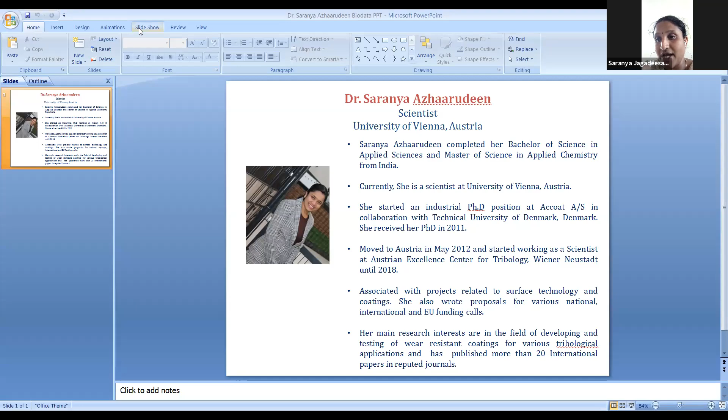Dear participants, it gives me immense pleasure to introduce today's speaker, Dr. Saranya Azhaarudeen, who would enlighten us on the topic Coatings Tribology for Protective Applications. She completed her Bachelor of Science in Applied Sciences and Master of Science in Applied Chemistry from India. Currently, she is a scientist at University of Vienna, Austria.

She started an industrial PhD position at Accoat A/S in collaboration with Technical University of Denmark, and received her PhD in 2011. She moved to Austria in May 2012 and started working as a scientist at the Austrian Excellence Center for Tribology, Wiener Neustadt, until 2018, associated with projects related to surface technology and coatings. She also wrote proposals for various national, international, and EU funding calls. Her main research interests are in developing and testing wear-resistant coatings for various tribological applications. She has published more than 20 international papers in reputed journals.

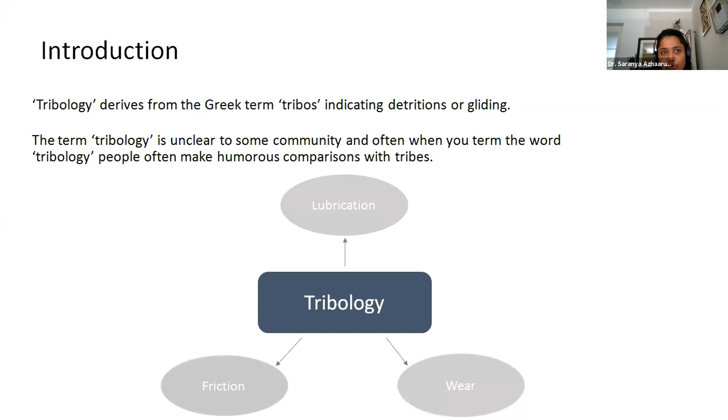So whenever I talk to my friends about tribology, people always ask, what is tribology, is it something to do with biology or with tribes? Because the term sounds very much related to tribes, but it has nothing to do with either, though it may be application oriented in biology. Tribology means friction, wear, and lubrication - any science dealing with these topics falls under tribology. There are many branches within friction, wear, and lubrication. Lubrication can involve chemistry, chemical engineering, mechanical engineering. Wear involves mechanical engineering, material science, surface coatings, chemistry, physics, and many more fields. Friction also has many comparisons we can draw from daily life. What is friction and what is wear? Next slide please.

So what is tribology? Why is it so multidisciplinary? It is a very interdisciplinary field, because if you start with the term tribology, there are so many fields involved. It starts with material science, because material science is a very basic thing for tribology to learn the basics.

In material science, corrosion prevention is one such topic, coating technology, tribochemistry, environmental technology, and recycling. These are the terms that count to material science when it comes to tribology.

When it comes to mechanical engineering, there are so many investigations possible, like damage investigations and testing of lubricants, testing of surfaces, and so many calculations involved in mechanical engineering when it comes to tribology. That is contact mechanics, and also tribometry, a field of mechanical engineering contributed only to tribology.

When it comes to technology, there are so many involved, like surface technology, construction technology, and knowledge management in tribology. And there are so many application-oriented technologies based on chemistry, like lubricant chemistry, lubricant technology, tribochemistry, tribo-layer formation, etc.

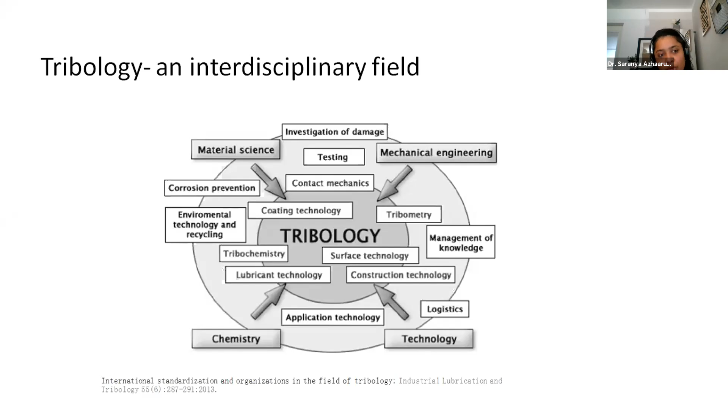So, tribology is really an everyday phenomenon. When you walk, you need good friction to have balance. When you don't have friction, you will fall. This is very clear.

Friction is everywhere, whether when you walk or, for example, in eye lenses. When you apply eye lenses, very good lubrication is very important, and this is also a part of tribology.

Many researchers are working on biotribology, focusing on improving the comfort of lenses, because I saw many people who use lenses having problems with lubrication, like burning sensation in the eyes, and they are not very comfortable. So a lot of research in the world is going on in biotribology, focusing on these lenses to increase lubrication and comfort for people who use them.

When it comes to sports, for example cycling, it's very important to have a very good grip between the tires and the road. This is basically friction. When you don't have good friction, you will really fall. So this is very important for safety measures, not only in cycling but in many other fields.

Like in aerospace industry and automobile industry, it's very clear they need very good friction in many fields, like trains and tracks. The friction between the wheels of the train and the tracks is very important, and they need to have very good friction to maintain good balance.

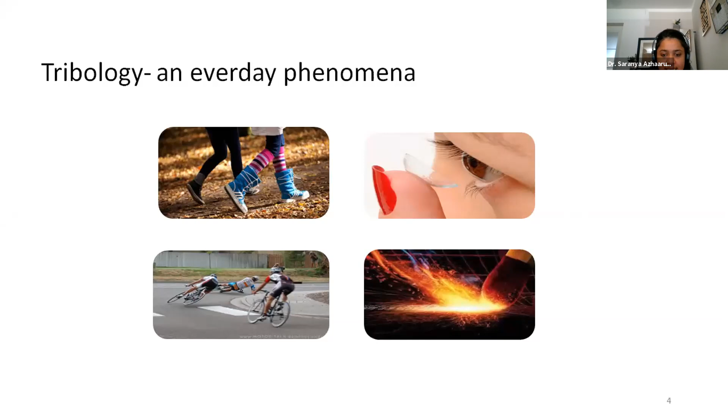So, friction - what is friction? Friction is resistance to motion between two bodies in contact. Whenever there are two bodies in contact, there will be a frictional force that we don't see, that you don't feel sometimes. It depends on how the surface is and how the other body is.

For example, in this picture, you can see a man trying to push furniture, and there is a motion involved in pushing. There is a force from the man and a motion happening, and there is a force of friction which always acts in the opposite direction of the pushing force. So whenever there is a two-body interaction involving sliding, there is always a frictional force involved.

For example, on a smooth surface you need a very small push because there is very low friction. Whenever there is high friction because of a rough surface, you need a big push and too much force is involved. These are very basic examples you encounter in daily life at home.

Friction always works in the direction opposite to the direction in which the object is moving. For example, when you try to push a book along the floor, friction makes this quite difficult, but when there is low friction, you can move the book really easily.

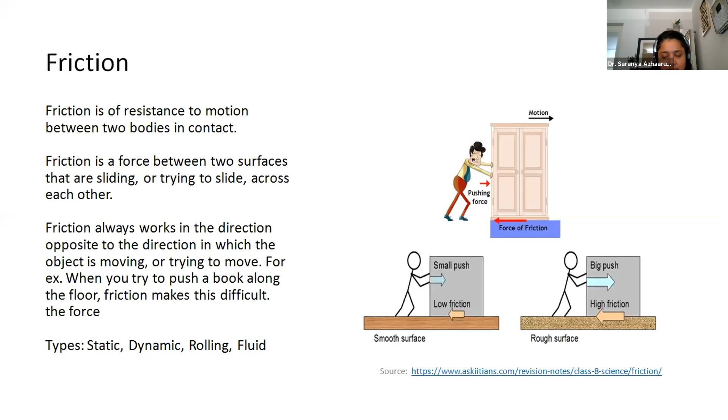Now, what is wear? Wear and friction are all interrelated phenomena. Wear is defined as the irreversible material loss of interacting surfaces.

Whenever there are two materials involved and sliding happens, there is wear - a problem of material loss due to friction or due to other conditions, like low lubrication or corrosion. Any wear can happen, and when wear is happening, there is a material loss.

There are so many wear mechanisms involved - physical and chemical processes within these sliding pairs which lead to changes in material, shape, or chemistry. This all comes under wear mechanisms. For example, if you see this picture, there are two bodies in contact, and there are some asperities - the form of the surface. There are so many possibilities of wear mechanisms that can happen.

Surface fatigue is one kind of wear mechanism where there is a fracture happening and material can be removed. Abrasion is a very common phenomenon - there is wear happening, and whenever there is material removal, scientists normally give importance to whether it happened because of abrasion.

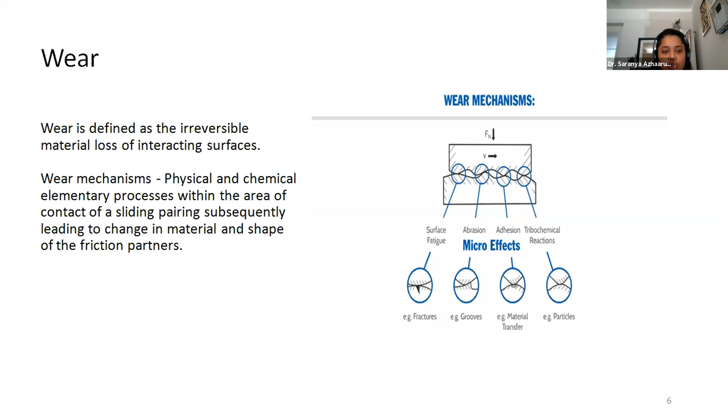Tribochemical reactions - there are so many forms of tribochemical reactions possible. Particles involved in the reaction can bring about tribochemical reactions, and lubricants used in such abrasion can also create some tribochemical reactions. So these are the four different types of wear that normally occur in any kind of sliding between two surfaces.

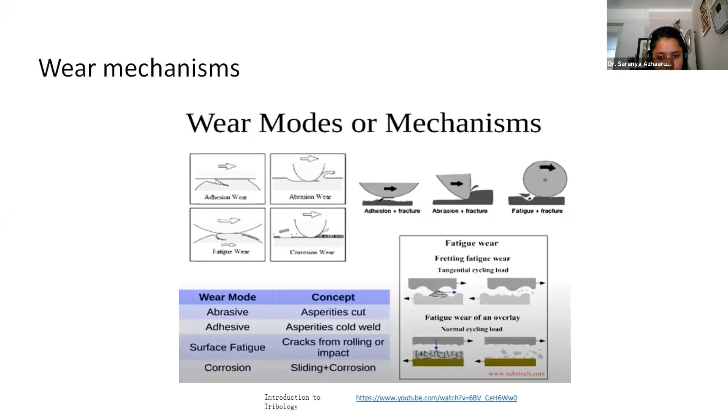So what is the interrelation between friction, wear, and lubrication? This is clear - whenever there are two surfaces, there can be increased friction between them that can cause wear, or there can be excessive heat formation. So these are the two possibilities whenever there is an increase in friction.

So what are the forms of wear? We have already seen adhesive, abrasive, fatigue, or corrosive wear. And what will happen when there is increased friction? That can cause a lot of problems, like loss of viscosity in the lubrication.

So you need to use more lubrication to achieve the same performance, to decrease the friction and decrease the wear. Or there is an increase in additive depletion, an increase in oil oxidation, or an increase in varnish potential. These are the problems that can happen when there is excessive heat formation because of the lubrication used.

These are the interrelations - whenever there is increased friction, there can be increased wear, and it can also form excessive heat. So the interrelation between friction, wear, and lubrication is very important to know what is happening on the surface and what has to be improved to improve the lifetime of the surface.

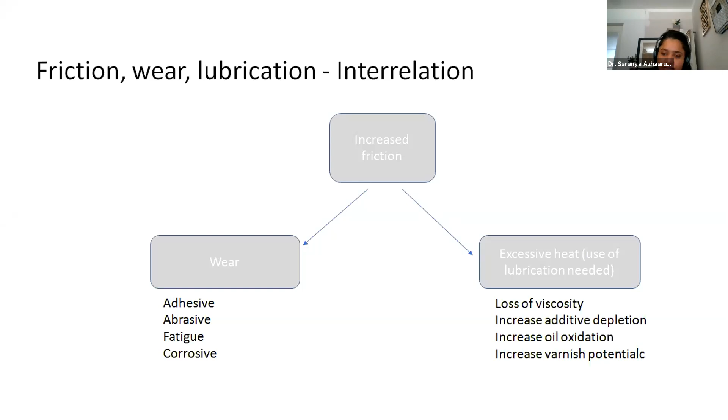So what are lubricants? Generally we are using lubricants in many applications in daily life - like even in cooking we use oil. This is to reduce friction and improve properties between the food and the surface. Same way, we use lubricants to reduce friction and wear between two surfaces. When it comes to automobile applications, we are well known that we use a lot of lubricants.

What does a lubricant do in an automobile or elsewhere? A lubricant's main function is to control friction, generally to reduce heat generation and energy consumption. It also controls wear - as I said in the last slide, it reduces mechanical and corrosive wear. It also controls corrosion, protecting surfaces from corrosive substances. And it controls temperature - whenever there is a rise in temperature because of friction or wear problems, it absorbs and transfers the heat, which is a very good property of a lubricant.

And what does it do with contaminants? Normally it controls the contaminant level in automobile usage or any surface that you use, and it tries to transport particles and other contaminants to the filter so that it reduces the contaminant level in the lubrication.

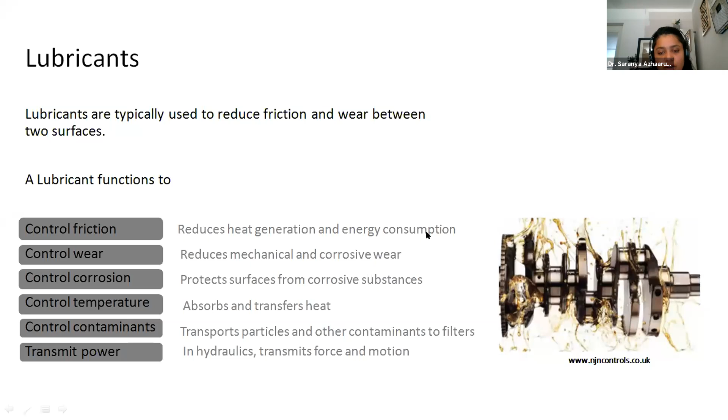And as I said, it transports particles and also transmits power - like in hydraulics, it transmits the force and the motion. So when you see a picture of an automobile part filled with lubrication, an oil lubrication... Can you change the next slide, please?

So, I don't know if you have heard of the Stribeck curve. The Stribeck curve is basic for any tribologist to work on any problem. It's named after Richard Stribeck, a well-known German mechanical engineer, who first described the concept in 1902.

This graph showcases how the generation of lubricant films is critical in reducing friction and wear of machine parts. There are three types of friction generally: boundary lubrication, mixed film lubrication, and hydrodynamic lubrication.

In boundary lubrication, when two surfaces come together, there is good contact between them. Lubrication happens at the boundary level, and sometimes in this case the wear is too much, so they control the wear using additives to reduce it.

In mixed film lubrication, some parts are touching and some parts are separated by the lubrication - that's called mixed film lubrication. Normally in such cases, wear is controlled by viscosity and the boundary lubrication film, and that's how it controls friction and wear.

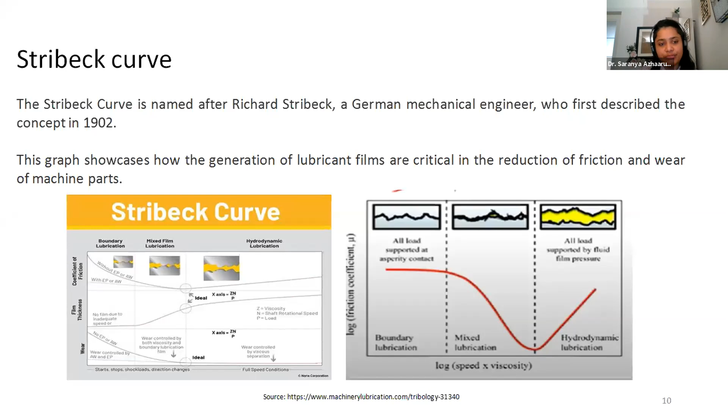So can you please change to the next slide? These are the common test rigs, test apparatus, that we use in our field of tribology.

To start with, I'll show the last machine, called pin on disc. In any tribology lab, you'll find a pin on disc machine. It's a very basic machine to study any kind of tribological behavior. The pin is holding on the disc, the disc is rotating, and the pin is in touch with the disc.

The pin can be steel material or a different material, and the disc can be coated, or the pin can be coated. In a third case, both materials can be coated and tested. This is a very basic test whenever there's this kind of tribology test.

The first picture is called the FZG test rig. In this test rig, you can see there are two types of gears tested. Normally here you always test two gears. This is a normal test used in the automobile industry to test the failure of gears and the lifetime of gears.

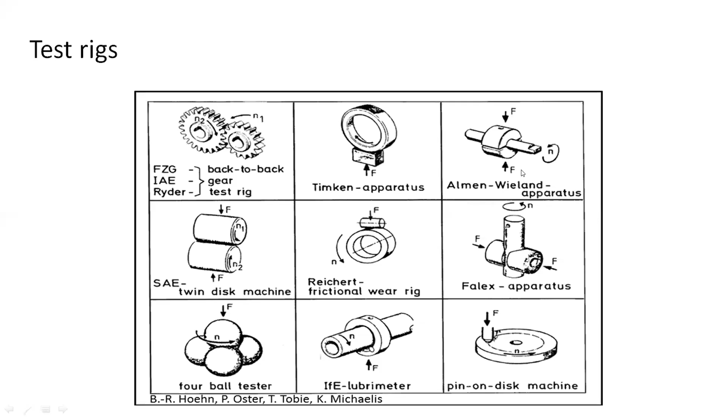There is also the Almen-Wieland apparatus, which is rarely used to test some specimens for frictional properties. The twin disc machine is also quite common, with two cylinders rolling to see how rolling friction happens between two surfaces. The frictional wear test rig is like a cylinder on a ring, where the ring rotates and the cylinder moves on it. You can coat the ring or coat the cylinder, or keep one as a steel specimen, to see how the coating and steel react on such surfaces.

Mostly, the Falex apparatus is also used in some typical mechanical labs. The four-ball tester is a very famous testing apparatus, with four balls to see how rolling friction, fatigue possibilities, abrasive wear, or adhesive wear happen. This is a very good form of testing all these possibilities in one test. There is also something called the lubrimeter, which is not really used much. In all these pictures, you can see pin-on-disc is the main apparatus used in almost every tribological lab.

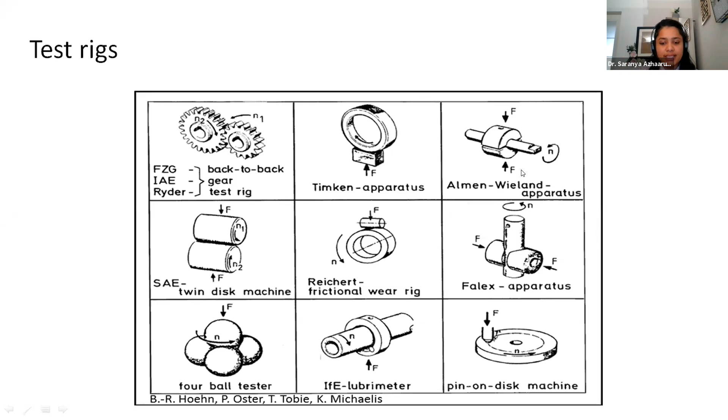So what are the lubricant types? You can categorize lubricants in different ways based on their form. Liquid lubricants, as the name says, can be a mineral oil, a natural oil, a synthetic oil, or an emulsion.

When it comes to solid lubricant, it is clear that it's a solid form of lubricant. It can be a powder, a coating on a surface, or a composite like graphite, PTFE coating, or molybdenum disulfide. I will talk more about solid lubricants at the end of the presentation.

Gaseous lubricants are in gaseous form. Semi-solid lubricants, generally greases, are called semi-solid because they're not liquid and not solid. Also, soap emulsified with mineral or vegetable oil is called a semi-solid lubricant. All these lubricants are chosen based on the application, like what you want to use and where, so depending on the application you choose which form of lubricant to use.

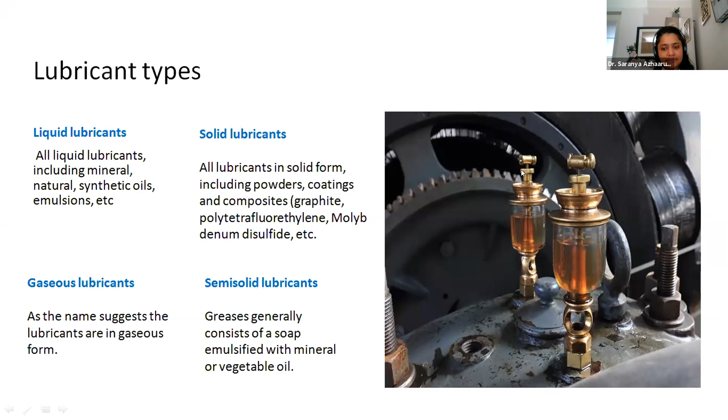So, additives. What does an additive normally do? As you see, we always use additives in automobiles, for bikes, cars, and everything. This is really to enhance an existing property of an already existing lubricant, or to add a new property, like to reduce wear, reduce friction, improve lubricity, decrease viscosity, or to suppress any undesirable property.

Undesirable means wear and friction, in automobile applications normally. The main types of additives we use are called anti-wear additives. Anti-wear additives are mainly used to reduce wear through the growth of a protective layer on the surfaces. For example, zinc dialkyl dithiophosphate, simply called ZDDP, is a very good example, very well studied in the field of tribology and lubrication. ZDDP is used in almost most studies related to anti-wear additives.

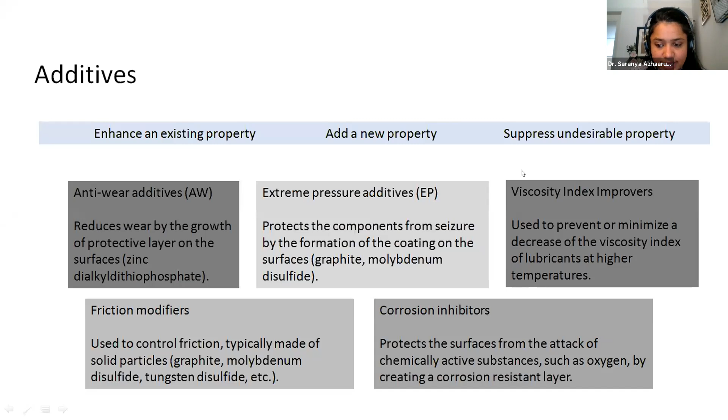What kind of additives are normally used when it comes to engine oils, ATF (auto transmission fluids), general oils, hydraulic oils, industrial gear oils, automotive gear oils, or greases? What kind of additives are normally used in these kinds of oils?

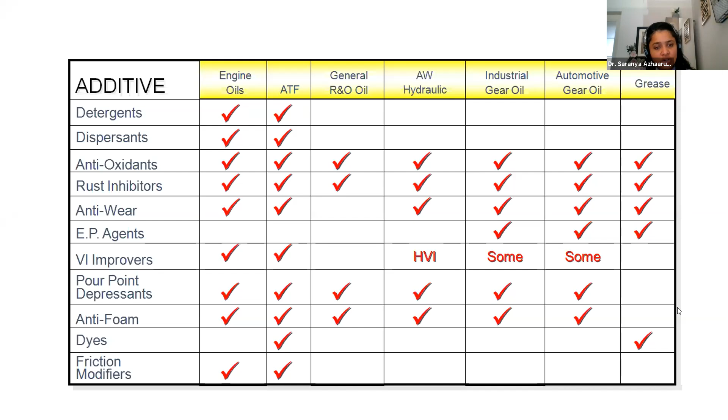Detergents are normally used in engine oils or ATFs. Dispersants are normally used in engine oils and ATFs. Antioxidants are used in all types of oils, and rust inhibitors are also used in all types of oils. Antiwear additives are used in engine oils, ATFs, hydraulic oils, automotive gear oils, industrial gear oils, and greases.

Extreme pressure additives are used sometimes in industrial gear oils, automotive gear oils, and greases whenever there is extreme pressure happening. Viscosity improvers are normally used in engine oils and ATFs, and sometimes in industrial gear oils and automotive gear oils.

Pour point depressants are used in almost all kinds except grease. Antifoam additives, dyes, and friction modifiers are also typically used in engine oils, ATFs, and other kinds of oils. So this is a table showing what kind of additives are normally used in different kinds of oils we use in daily life, in automotive or other applications.

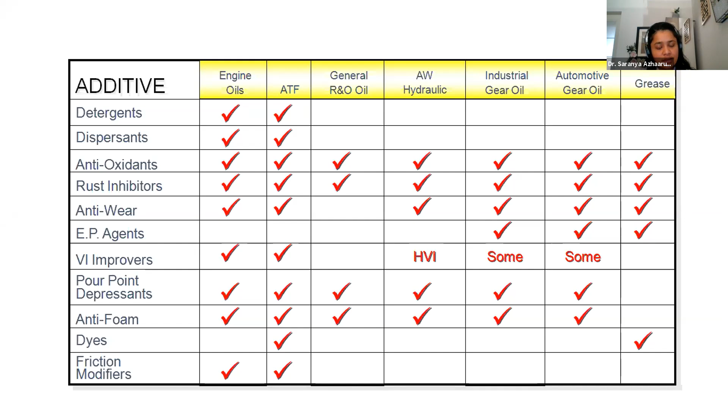I'm not a very big expert in additive chemistry, so I'm just giving an overview of what kind of examples we have in antiwear agents.

Antiwear agents are mainly used because they have a very low activation temperature - you really need only a low temperature to activate them. They can create a durable layer that shears easily under boundary lubrication conditions. That's the main usage of antiwear agents.

These kinds of layers are very important in some applications. In cases like ZDDP, they replenish these layers, which improves the lubrication for a long time. That is the main point of using antiwear agents in such applications.

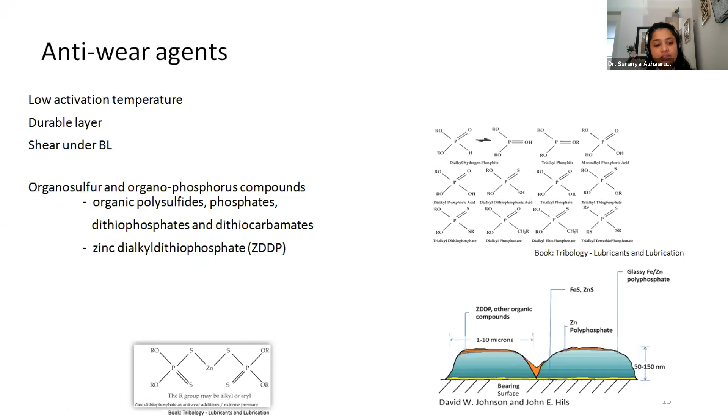Extreme pressure additives are mostly used when you need anti-seize or anti-scuffing properties. Generally, EP additives need a very high activation temperature compared to antiwear agents, and they form extremely durable protective films.

These thermochemically formed layers are extremely durable in the case of EP additives. Normal examples are iron phosphide, sulfide, sulfates, oxides, and carbides - these are the main examples used for EP additives, to avoid micro welding, scoring, or seizing of materials under extreme temperature and mechanical pressure.

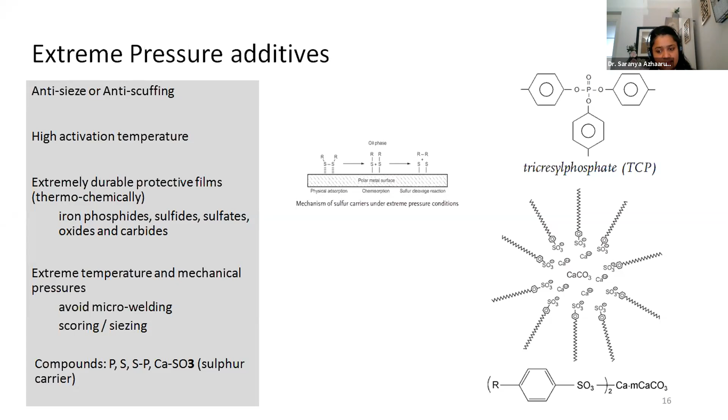Friction modifiers are really a very mild antiwear or EP additive. They are also called, in transmission fluids containing them, 'anti-squawk' additives - normally called friction modifiers.

They have durable, low-resistance films formed because of an adsorption mechanism when using friction modifiers in the oil. Mechanically working solid lubrication compounds like MoS2 and PTFE are also a form of friction modifier. Their classification is mainly based on how they form these layers - for example, adsorption layers form with long chain carboxylic acids.

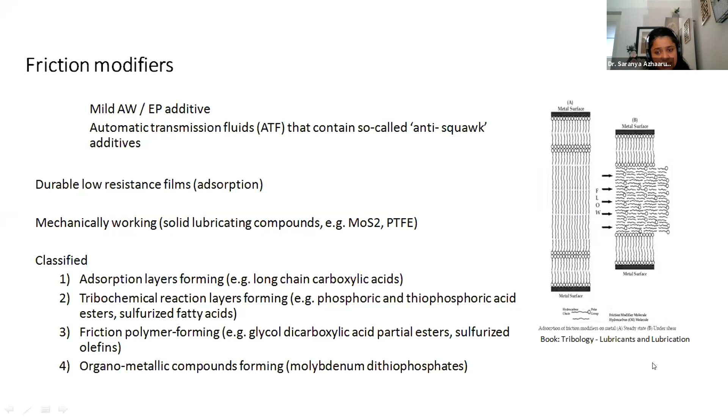They also form tribochemical reaction layers with phosphoric acid and thiophosphoric acid esters, sulfurized fatty acids, and friction polymer formation can also occur. Sulfurized olefins and glycol dicarboxylic acid partial esters are also examples, as are organic metallic compounds and molybdenum dithiophosphate. As shown in the picture, friction modifiers flow between metal surfaces to improve lubrication properties.

Foam inhibitors are also a kind of additive, normally used to enhance the oxidation and cavitation properties. Whenever there is insufficient oil transportation, these foam inhibitors are used. The mechanism is mainly to attach and separate bubbles, coalesce them into a bigger bubble, and rise to the surface, easily carried out of the lubricant due to insolubility and their strong affinity to polar metal surfaces.

The foaming tendency is influenced by many different factors, especially surface tension, which is very important for foam formation. Surface active substances like detergents, corrosion inhibitors, and other ionic compounds are very much influenced by surface activity. Surface foam and inner foam are also physically dissolved up to 9% in mineral oil. So these are the factors that normally influence foam inhibitors.

Linear and cyclic polydimethyl siloxanes are a typical form of foam inhibitor. I don't want to go into detail on this topic since it's not my expertise, so there are just some examples I wanted to give.

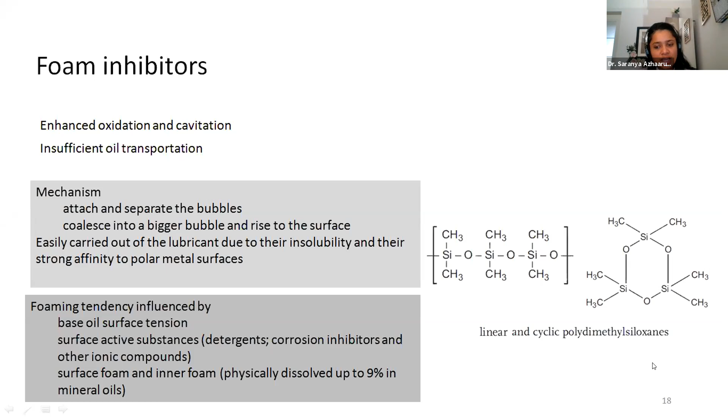Can you please change to the next slide? Yeah, so as many people know, there are many methods.

Viscosity is a very important parameter for a lubricant, and the Stabinger viscometer is one kind of viscometer that calculates viscosity. The higher the viscosity index, the better the lubricant. So whenever the lubricant performs well, they always check if the viscosity index is higher, which is better because of a minimum change in viscosity when there is a temperature rise.

ICP, inductively coupled plasma, is a very common method used for lubricant analysis, famous for analyzing the elements in additive substances, particles, and contaminants if there are any in the lubricant. FTIR is also a very famous analysis method used in almost all forms of chemistry—Fourier transformation infrared spectroscopy—which identifies lubricants and their components through qualitative and quantitative analysis of lubricant conditions.

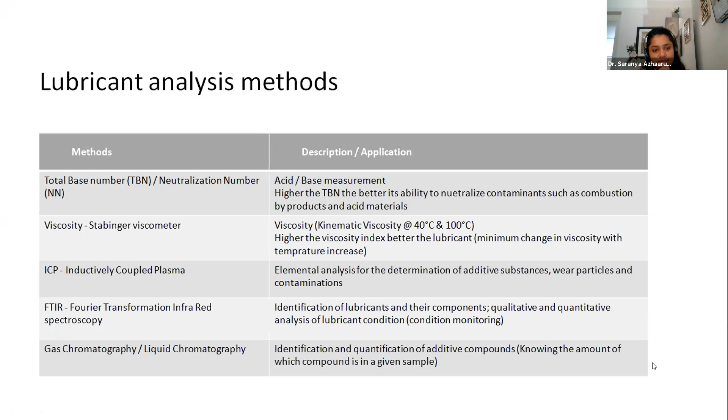Can you please change to the next slide? I'm not sure if many people have known this, but Volkswagen, a very big company in Germany, was involved in a scandal with diesel emissions. It was very big news at the time, I think in 2016 or 2017.

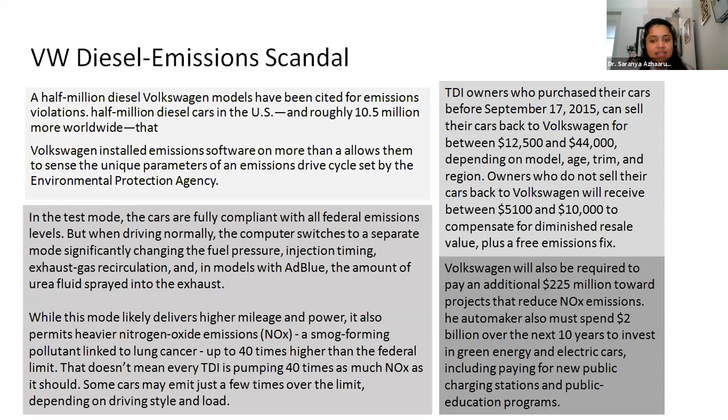So can you please change to the next slide?

It is clear that with increasing temperature, the viscosity of the oil is different, and the lubricant flow is also different. So mainly, to understand lubricant transportation on a surface, the tribological parameters have to be understood so that good lubricant transportation is formed between surfaces in automobile or other applications.

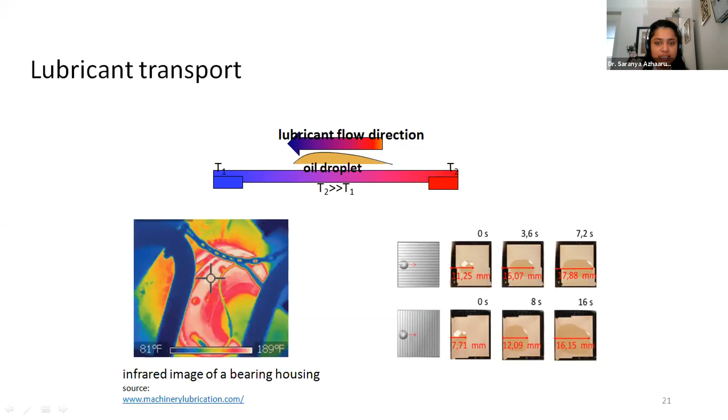So this is an example to show how lubricant studies are related to the tribology field. Can you please change to the next slide?

These are the basic things I covered, like friction, wear, the forms of wear, and lubrication. Generally, tribology can be applied in many fields, like the energy industry. For example, wind turbines need their blades to have a very good wear life, like for 50 years or so. They really have to have a very good lifetime. In that case, tribology is used in the energy industry.

There's a big Danish company called Vestas that invests billions of dollars in research related to energy tribology, to improve lubrication and wear properties of the blades, so they don't have to replace the blades once a year, because it's too expensive to change or protect these kinds of surfaces. So they're really trying to apply tribology in these kinds of industries. That's an example from the energy industry.

When it comes to the aerospace industry, there are also many forms of tribological studies happening. I work in a department dealing with aerospace industry applications, mainly studying tribology in helicopter gears. Why is it so important to study tribology in helicopter gears?

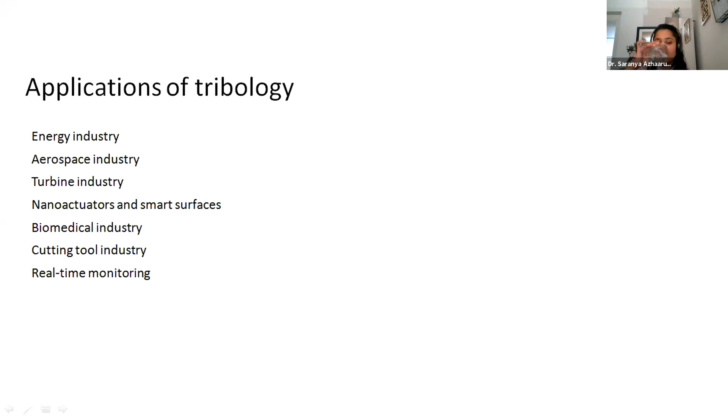So as I said, how important is tribology in machine elements? As I told you, there are many examples like in the aerospace industry and automobile industry. In machinery, for example bearing and gear drive, it's really important to understand what is happening related to tribology. In production and machining, tool industry, it's very important to see how tools are manufactured without any defects. In transportation, the friction between tire and road is very important. In medical technology, for example hip joints in biomedical industry, tribology is important to know how lubrication function between the hip joints works, and the lifetime of these joints. I will give more examples later.

Operational parameters are also very important in all these applications. So what are the main operational parameters? Whenever we start a tribological test, we have to decide what kind of load we need to apply in this kind of application, and what kind of motion we need. We are applying a load on a surface, and how much load we apply has to be determined based on the application. We also want to know what type of motion.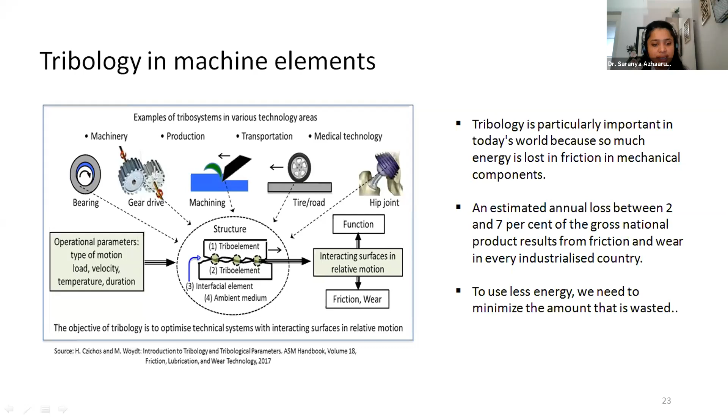The role of tribology in energy efficiency: if you look at a race car, a race bike, a roller bearing, a ball bearing, normal gears, or a tire on a road when it's raining or snowing, everything is important when it comes to tribology and energy efficiency.

By doing this, we can save a lot of money in energy efficiency, and we can also improve the environment by reducing these kinds of losses using tribology. Energy and raw material resources can be conserved for future generations, environmental damage can be avoided, and occupational safety and protection can be improved.

Many accidents are happening in the tool industry even now, which can be improved by really knowing what is happening between two surfaces - is it a frictional problem, too much heat dissipation, or really a normal tribological problem? These are the things we have to know about why tribology is important in energy efficiency.

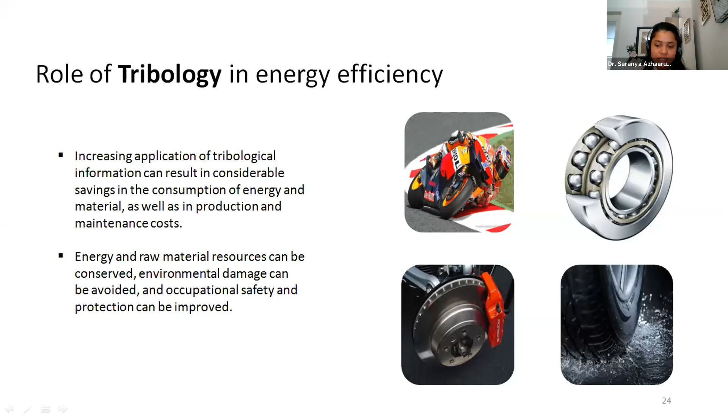This is more related to my topic, materials tribology. What kind of materials do we use every day? We use a lot of metals and alloys, ceramics, composites in the airplane industry, and lots of polymers and plastics. In countries like Europe and the USA, we use a lot of wood for construction and other purposes. Different engineering parts are subjected to tribological loading at different loads, speeds, temperatures, and environments.

In India, South India is very warm, but North India is really cold. Also in Europe and the USA, it's really cold in some places. So you have to know how the system performs in a warm environment and how it performs in a cold environment. This is really important.

The study of materials in different environments when subjected to friction and wear is materials tribology. Why is it so important? Because we have to select materials based on engineering requirements.

In some applications you have to reduce weight, where composites are of much interest, like in the aerospace industry, in planes. In other cases metals are important - especially steel, stainless steel, which is very important for corrosion protection. Metals are the basics of materials tribology because you do a lot of testing with metals, especially steel and aluminum.

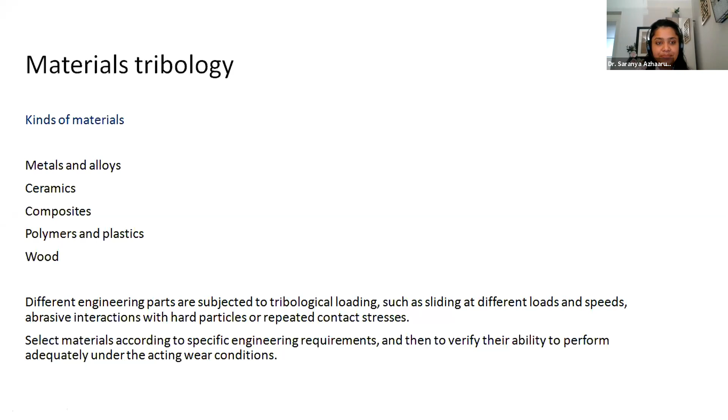When it comes to tool failure modes, or surface failure modes, these are the main kinds of failure modes that can happen, in addition to wear - different kinds of material failure modes. Wear, that's clear.

If you see the picture, what kind of wear is this? The material is removed from the surface - that's wear. There is edge removal from the material. What will happen in the tool? The hardness will increase, the ductility will increase, and the friction coefficient will decrease because the material has been removed a little bit.

The next main form of failure is plastic deformation. Why does plastic deformation happen? It can happen due to very high contact pressure, which can exceed the compressive yield stress of the tool material, compressing the material and permanently damaging it.

As you see in the second picture, it's plastic deformation - you cannot change it because the material is deformed. It's not elastic deformation; the material won't come back to its normal state. It's really, really deformed completely so it cannot return to its original state. The hardness will increase, the yield stress can increase, and the local die pressure can decrease. These are the normal problems with tool failure, and chipping is also a kind of chipping of the material.

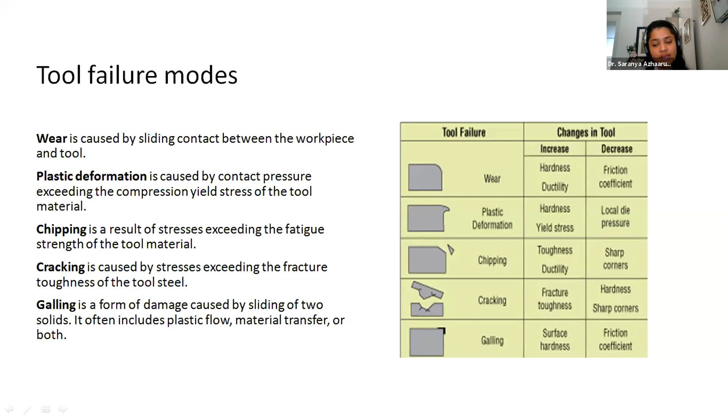What are the factors affecting tool life? There are four different factors. As I said before, the contact pressure, the surface quality is a very big factor, tool quality and tool coating which is a very important factor, and lubrication, this is clear from my previous slides.

Why contact pressure? Because the contact pressure decides how the two surfaces are in contact. When there is a very high contact pressure, the two surfaces are very compressed against each other, so the tool failure will increase dramatically. When there is a low contact pressure, there's not too much pressure, and maybe the tool life is improved.

Surface quality: the surface of the tool is sometimes much smoother than the surface of the sheet. In that case, surface quality is very important—whether it is a rough or smooth surface, or has lots of defects in the surface where materials can go and hide. In those cases, surface quality is very important.

Tool coating, why is it very important? Because whenever a tool is coated, for example with molybdenum disulfide, a zirconium coating, or a chromium nitride coating, it has a low coefficient of friction, so it can easily reduce galling and tool wear. Lubrication again performs better when it comes to tool life, to decrease the wear and to decrease the friction.

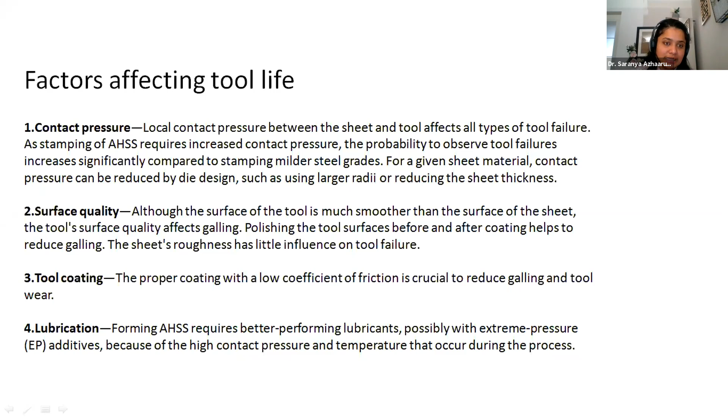Thank you, can you change please to next slide? Coating—so what is coating? Coating is generally a covering that is applied to the surface of an object, and it can serve any purpose. For example, it can be decorative—in flower vases, sometimes there is a coating just to improve the look of the vase.

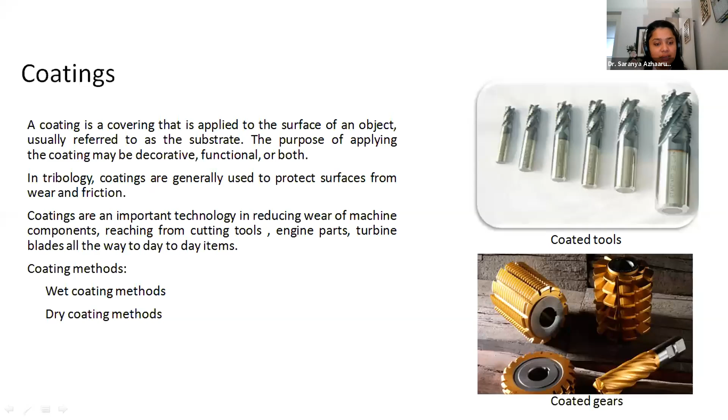It can also be to protect the surface. For example, in car windows you can see there is a black coating so nobody can see inside the car—this is a kind of protective coating. Generally engine parts are coated, turbine blades are coated, and cutting tools are coated to improve their performance. Coating methods are generally wet coating or dry coating—two different coating methods. You can see coated tools, for example in the picture, with a gold color, or titanium coated, which is gray color. Can you please change next slide?

Wet and dry coating example. Spray coating is a very typical wet coating method because it's very cheap—you just have to apply it to a surface by spraying. The material inside can be a powder, so you can have a powder spray, or it can be a powder in a liquid, so you can have a wet spray. This is a clear example of spray coating.

Spray coating can make a thin coating or a thick coating, depending on how many layers you want. You have to dry the coating and then apply one more spray coating layer—this is a way of increasing the thickness on the surface. PVD, physical vapor deposition, is a typical dry coating method, but it is an extremely expensive technique that many people don't want to use because of the cost.

And even for small parts to coat, this is very complicated. So very few companies are really professional in making these kind of PVD coatings. In those cases, if it's needed, they go for PVD coating because it's very expensive compared to wet coating like spray coating, or dip coating, where the substrate is dipped into the coating material so the coating forms on the surface. This is also a form of wet coating.

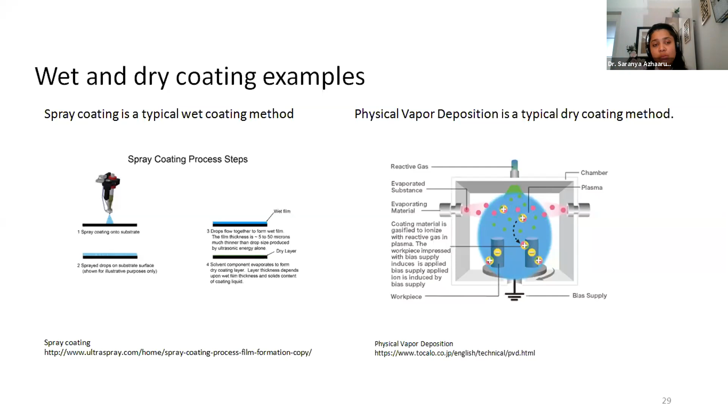So why are we doing surface treatment, why are we doing coatings? Generally, to increase the tool life or to reduce friction on any kind of surface. There are so many forms of surface treatment, but I don't want to go into detail since it's a big topic. Some examples are heat treatments, which are good to improve the hardness of the material, and nitriding, a very good example followed in many industries, especially steel industries. Hard chrome plating is a very famous form of electro deposition. And for dry methods, there's PVD, physical vapor deposition, CVD, chemical vapor deposition, and thermal diffusion. They're all expensive dry methods to coat surfaces.

What kind of common coating materials do we use in PVD and CVD? Generally nitrides and carbides - they are the best form you see in PVD and CVD coated substrates, like titanium nitride, chromium nitride, titanium carbide, or tungsten carbide. I was working in my PhD mostly on chromium nitride and titanium nitride coatings for non-stick applications. They are very good at forming very thin coatings with a good resistant wear layer, and this is clear why it's used in many applications. Solid lubricant films such as DLC and MoS2 are also very popular.

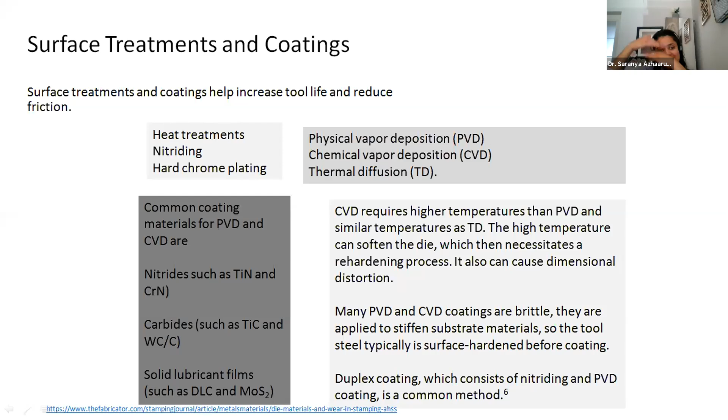So normally they improve the hardness of the coatings with layers - a first layer on the surface and a second coated layer. So they always have an adhesion layer on the surface to improve adhesion and wear resistance. Duplex coating is called that because it has a nitriding layer and then a coating layer - layers of coatings which improve lifetime, because one layer wears off first, then the second layer, then the third layer. So there's always a lifetime improvement for these coatings.

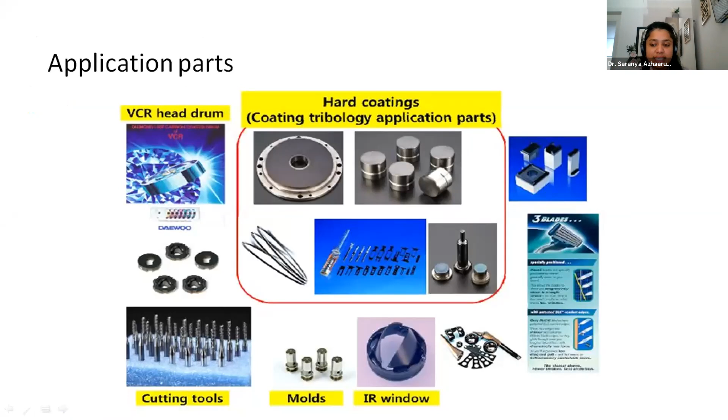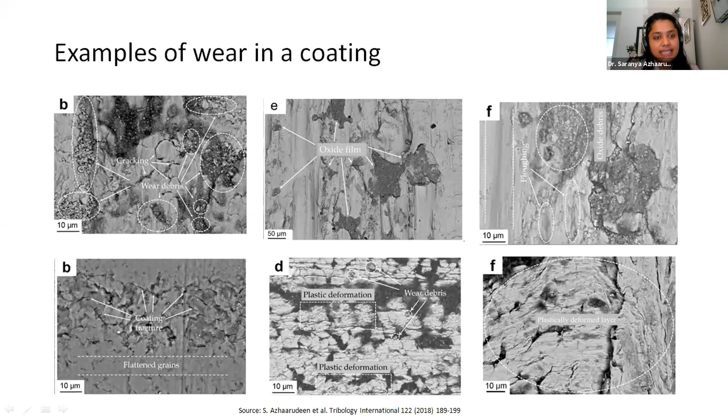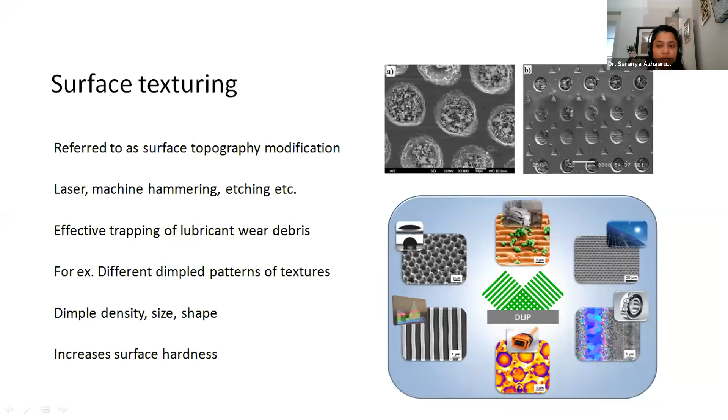Can you please change the next slide?

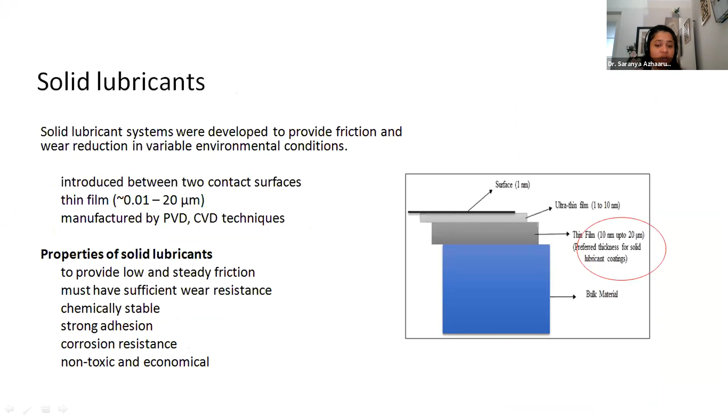Okay, solid lubricants. As I said, solid lubricant is a form of coating. But why do we have solid lubricants? Because we have a bulk material, a thin film, and a surface, and we always need low and steady friction. We have to improve the wear resistance. It has to be an adhesive layer, a corrosion-resistant layer, non-toxic, and economical. So this is why you use solid lubricants.

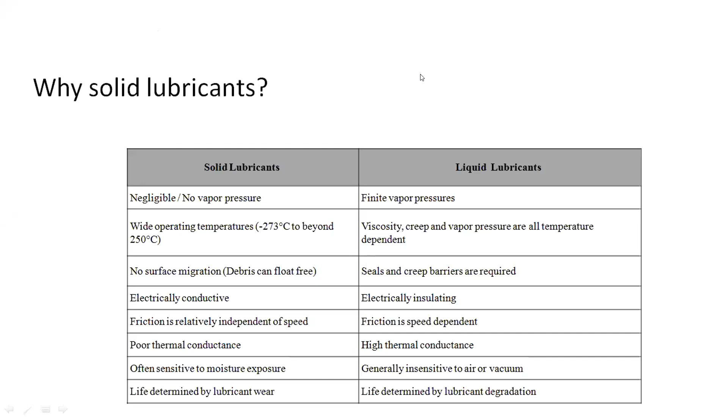So why solid lubricants? Why are they very different from liquid lubricants? Because they have negligible, almost no vapor pressure compared to liquid lubricants, and they have a wide operating temperature range, like minus 273 degrees Celsius to 250 degrees Celsius. That's why they're used mostly in space applications. There's no surface migration, and they are electrically conductive, and friction is really independent of speed, which is why it's very popular.

Solid lubricants have poor thermal conductance, while liquid lubricants have very high thermal conductance. In liquid lubricants, friction is very speed-dependent, but in solid lubricants, it's really independent of speed. Solid lubricants are often very sensitive to moisture, while liquid lubricants are very insensitive to air or vacuum. Also, life is determined by lubricant wear in solid lubricants, while in liquid lubricants it's determined by lubricant degradation. Can you please change the next slide?

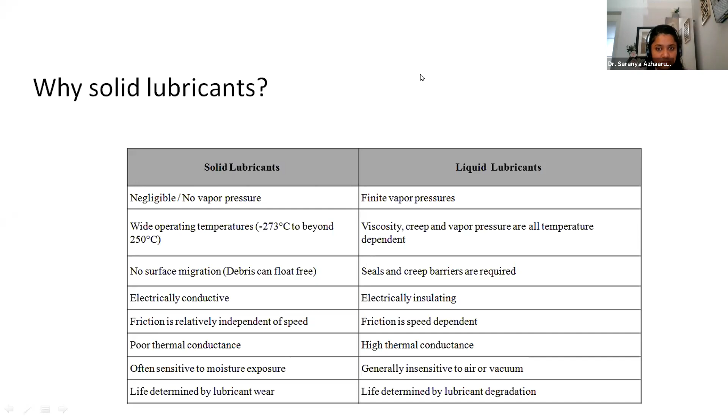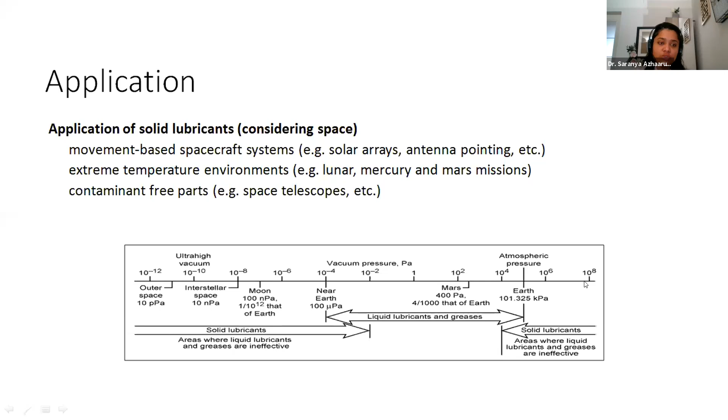The main application of solid lubricants is in the space industry because of the temperature range it can sustain compared to liquid lubricants, and also because of the friction properties. In solar arrays, antenna pointing, and Lunar, Mercury, and Mars missions, many solid lubricants have been used. Mainly MoS2 is a common form of solid lubricant used in space. Can you please change the next slide?

So can you change the next slide?

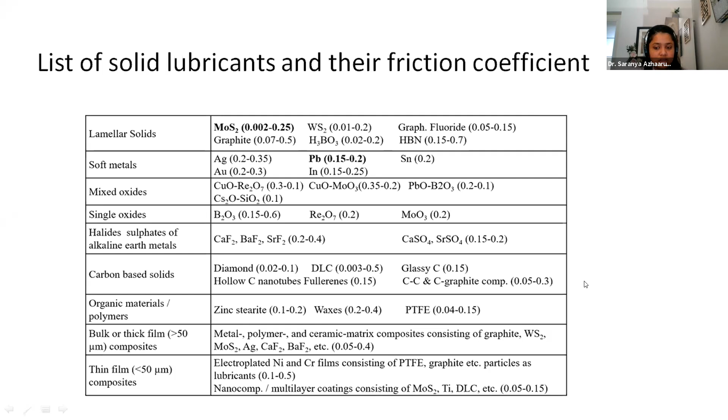Types of solid lubricant, as I said, MoS2, PTFE, and DLC are very good examples. MoS2 is a very well-known solid lubricant because it has distinct layers, a layer kind of thing which shears easily, layer by layer, which is very good for many applications.

And there is a drawback because oxidation can take place and it can change its form from molybdenum to molybdenum oxide, and sometimes under ambient environment the friction and wear increases. So this is a problem in MoS2.

In PTFE, it's very well known that Teflon is very famous even in the cooking industry for low friction coefficient, for cooking and many other applications. Even in the food industry, many parts are coated with PTFE to improve lubrication properties. My PhD thesis was mainly focusing on studying the difference between PTFE coating and other coatings when it comes to non-stick properties, and PTFE is always a winner because of its very low friction coefficient.

And it is a very soft material. Sometimes it can wear easily. It has very low friction, but it doesn't have very good wear resistance. So normally what people do is they will always have a ceramic layer and then coat PTFE on it so it can have very good wear resistance.

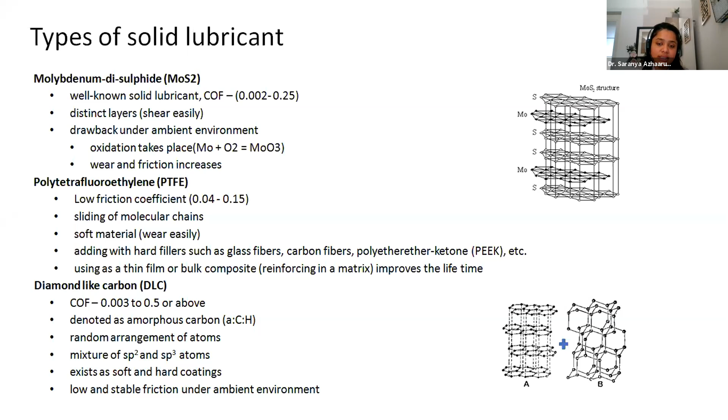So biotribology. What is biotribology? As the name sounds, it's the application of tribology in the biology field. When it comes to biological tissues like forming cartilages, blood vessels, and ligaments, whatever has to do with tribology in biology is called biotribology.

Dental repairs is also a very good form of studying biotribology because many people have this problem and want replacement. What will happen when we replace these kinds of teeth? Will it last 10 years or 2 years? This is very important to know for the lifetime of these dental repairs, and dental tribology is a very big field. People are publishing lots and lots of papers in dental tribology.

And tribology of skin, lubricants and touch. This is very famous when it comes to companies like Unilever, because they do lots of creams and a lot of tribological research. In Bangalore, they have a research center doing this kind of research on tribology of skin and lubricants for their creams on face, to see how the cream will be applied - is it too soft, too liquid, or too greasy? So it can change the feeling of the lubricant on the surface.